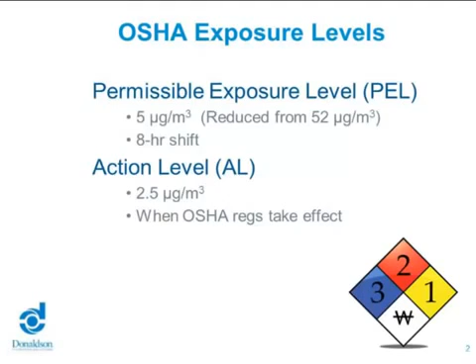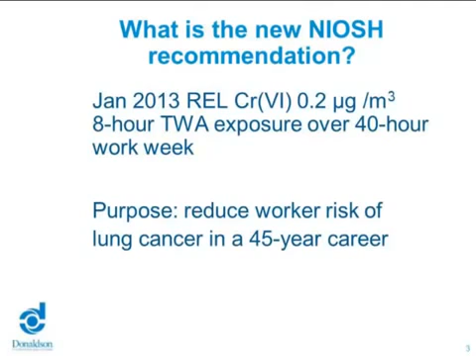The new NIOSH recommendation is a recommendation that came out in January of 2013 originally. The recommendation is to reduce the level from the 5 micrograms it is today down to 0.2 micrograms over an 8-hour time-weighted exposure over a 40-hour work week. That's a dramatic drop. Now in September, NIOSH came out with a revised version of that, but the recommendation did not change. The purpose of reducing it from 5 micrograms down to 0.2 micrograms is to reduce worker risk of lung cancer in a 45-year working time.

I'm a pretty visual person, so I like to have some kind of an idea in front of my eyes on what all this means. And so what you're looking at on the screen right now is our 2 canisters that are 2 3/4 inch diameter by 3 5/8 inch tall. What I did is I said for a typical system where it's welding, where a majority of the hex chrome is produced, I calculated for an 8-hour day, 40-hour week, 10,000 CFM, 17,000 CMH system, how much hex chrome could be emitted or someone could be exposed to in a year.

Now what I found was through those calculations at 5 micrograms per meter cubed, someone could be exposed to 172 grams per year. The canister that you see on the left is about halfway full. Then you go to the right where the new recommended exposure level of NIOSH is, and you do that same calculation, and the number turns out to be 7 grams per year. You can see that barely the bottom of that canister is being covered. So it goes without saying that that's a dramatic drop.

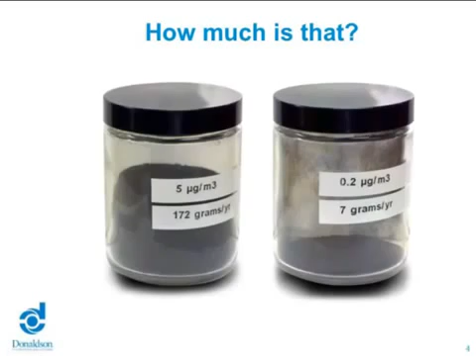So what processes produce hexavalent chromium? As I previously mentioned, welding is probably the single biggest producer of hexavalent chromium. And welding on stainless steel in particular is a pretty significant source. Another source is thermal spray, which is what you see on the right-hand side. And other processes include battery making, cement manufacturing, abrasive blasting, rubber manufacturing, coatings like spray paints and pigments. If somebody is chrome plating, the open baths can produce hexavalent chromium, and leather tanning. So there are a lot of places where hexavalent chromium can be produced.

Now, one thing to point out is there are some good uses of hexavalent chromium. Hexavalent chromium itself can be a good anti-corrosive agent when it's added to paints, primers, and other surface coatings. And also, a hexavalent chromium compound called chromic acid, used to electroplate chromium onto metal parts for decorative and protective reasons, is another good use.

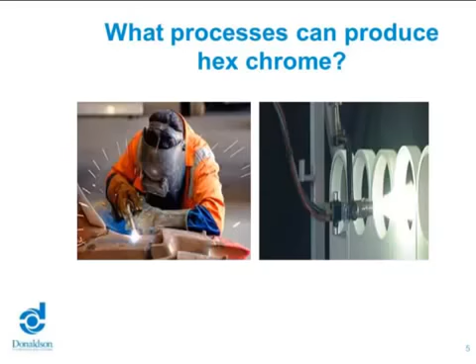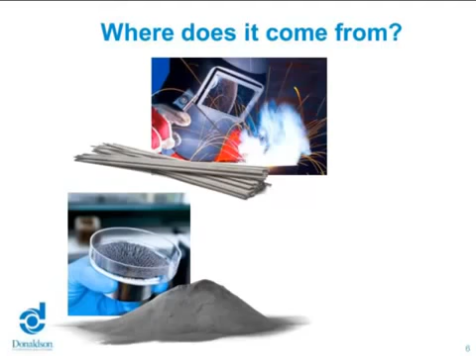So where does it come from? Well, chromium is in the mixture of, for example, what you see in front of you, the welding stick or the thermal spray wire that's used in each of those processes. Or it could be in the powder for thermal spray, or it could be in the base metal that you're either welding to or doing some kind of process on.

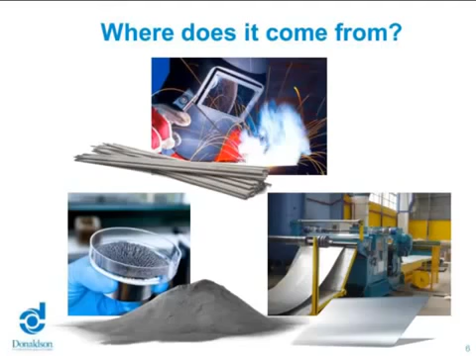In the chrome bath, for example, it's in the chrome bath itself. And what you have to realize is these aren't just pure chrome. They're mixed with other materials like aluminum, antimony, arsenic, chrome, cobalt, nickel, iron, lead, moly, manganese, silver, and tin. So there are percentages of those metals mixed in with these depending on what you want for the outcome of the process.

So people ask me, being in a filtration company, can I just filter hexavalent chromium? And the simple answer is no, and it goes back to the point I made a few minutes ago, which is that the materials used in the initial process are already mixed with metals. So when you have an overspray process of thermal spray, or you weld, or you generate some kind of fume, the fumes contain mixtures of the metals as well as the hexavalent chromium. So I like to think about the hexavalent chromium being the seeds inside the orange, where if you filter out the orange, you are going to actually filter out the hexavalent chromium.

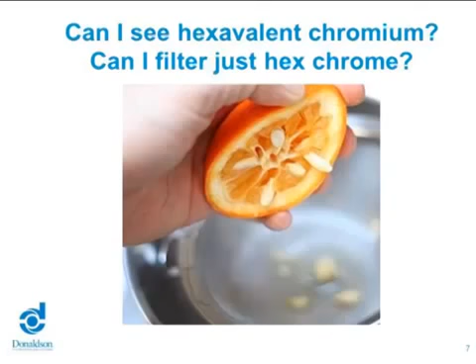People always ask me too, well, how do I prove what level of hexavalent chromium I have? And the reality is there is a specific test for hexavalent chromium. The OSHA ID is ID-215. It's, again, specific for hexavalent chromium. It's a test that lasts about 8 hours. And what really happens is a person properly protected for the exposure of hexavalent chromium goes into the area and spends 8 hours being exposed to the exact same things that anybody who's working in that area would.

And then once the samples are taken, they get sent to the OSHA Salt Lake Technical Center in Utah, where they are analyzed. It's a time-sensitive test, so it has to be analyzed within 8 days of sampling. Essentially what they do with the sample is they precipitate out the hexavalent chromium and then report back how much hexavalent chromium was in the sample, so you can use that to estimate how much hex chrome you are producing in your facility.

If you want more information, I'd highly suggest you go to OSHA's website at osha.gov or contact them at 800-321-OSHA. Every time I've called them, they've been very helpful, and I have gotten somebody on the phone live in a relatively short amount of time. So I encourage you to do that.

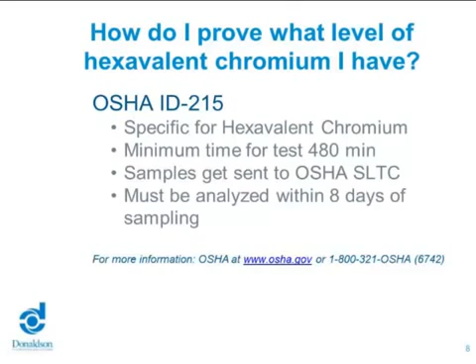So I also wanted to understand, when I was doing my research, what were the hexavalent chromium inspection levels like? There is a study on OSHA's website. It's a 2006 to 2009 study, so it's before the regulations actually took effect. It's called an industry sector profile. And in that profile, there were 437 records, each record being a company visited, and 65% of them had hexavalent chromium in the air.

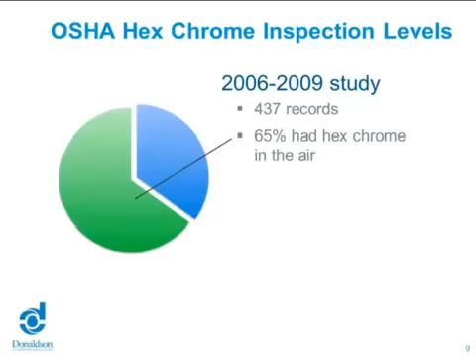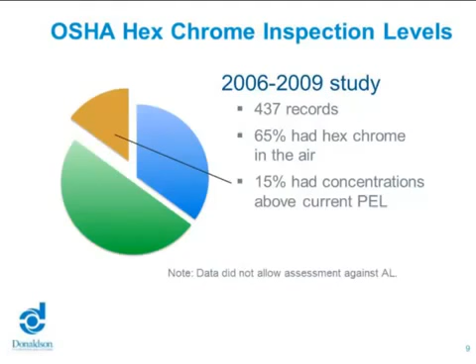Now, of those 437, 15% actually had concentrations above the current permissible exposure level. Another way to look at that is to say that of the 65%, 23% had concentrations above the permissible exposure level. Unfortunately, the data did not allow me to do an assessment against the action level. And it would be nice to understand what the numbers would look like if we were to evaluate those same companies against the new recommended exposure level by NIOSH. Hopefully in time we'll get there.

So many of you are probably wondering, what should I do now? Well, I came up with the acronym Rescue Me, so we'll go through that right now. The first thing is every company or anybody in your facility should review your production processes. Look for those processes that could be producing hexavalent chromium. Look for materials that you're bringing in that could contain chromium itself. And then think about how those materials and processes interact and see for yourself if you think the process is producing hexavalent chromium.

OSHA will drive everybody to eliminating the source processes wherever possible. And one example I can think of to get the juices flowing is to think about a weldment. Let's say, for example, a company makes a particular weldment and they make thousands of them in a year. Well, if you ask yourself, what if I took this weldment and gave it to a casting company and they made it out of a casting?

Well, that would certainly eliminate the source process there, and there might even be a byproduct where your company may realize a cost reduction. So it's worth investigating your processes and the materials together and seeing where there might be opportunities to eliminate them, because you might get other benefits other than just reducing hex chrome in your facility.

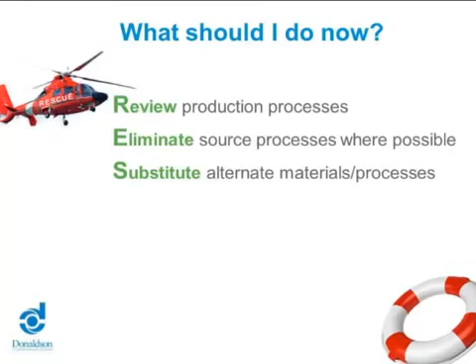Lastly, if you can't eliminate them, OSHA says the next step should be substitution of alternate materials. Certainly, you have to look at your customers' requirements and make sure that whatever you're doing, you're meeting those requirements. But if you can use alternate materials and achieve the same performance as the customer expects, that's really the next step.

And if you can't do either of those, or if there's just a situation where it makes it very difficult to do those, then the next step is controlling it using local exhaust ventilation best practices. I'm going to talk a little bit more about that later on in the presentation, but just to give you a snippet right now, local exhaust ventilation means having a hood that's located close to the process, designed appropriately to pull in any fumes or any dust or mist that could be creating hexavalent chromium,

and then a properly designed grouping of ductwork back to a filtration device or sending it out the building. So that's just a quick snippet of what local exhaust ventilation means. So that would be controlling it, removing it from the airspace that your employees are working in. Next is to understand the impact. Once you've done all of that work, you have to understand what you have done and whether you've made a difference. And so that may mean more testing and more evaluation.

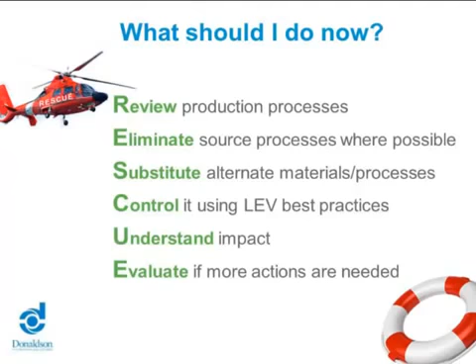And lastly, if you've done all your work, you have to actually evaluate whether or not more actions are required, and that may force you to start over and review your processes again. So this is the first time of two that I'll remind everybody, but rotation of employees as a method of compliance to the permissible exposure level is not allowed. That's clearly noted on OSHA's website, so I just want to make sure that people keep that in mind.

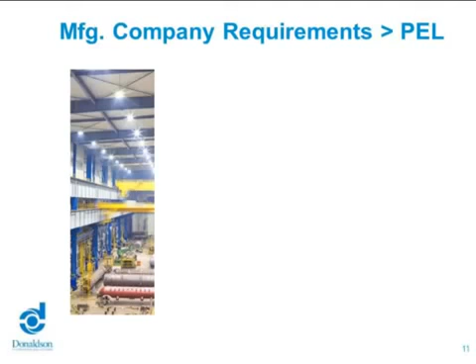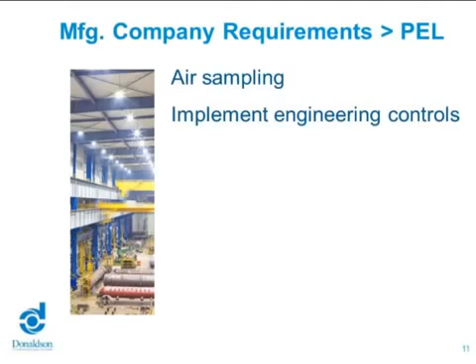Involving employees and operators in the solutions that are being talked about and hoping to be implemented is certainly a good best practice for industry. You'll get adoption much quicker if you do that. So if a company finds themselves currently above the permissible exposure level of 5 micrograms per meter cubed, there are a number of things that have to be done. One is air sampling, and I'll talk a little bit about the frequency of air sampling on a later slide. But air sampling is a requirement of any company that has exposure levels above 5 micrograms per meter cubed. Next is implementation of engineering controls, which we talked a little bit about already.

Respiratory protection program. This is really key, that if an area is known to produce above 5 micrograms per meter cubed today, the respiratory protection program has to be in place, and it has to be documented. Medical monitoring of employees. Remember, this actually starts at the action level, but it's also required at the permissible exposure level of 5 micrograms per meter cubed. And demarcation of work areas. This is really important for not only employees but also visitors to your facility. You have to mark off the areas that could be producing hexavalent chromium, so people are warned of what they could be exposed to. And a part of that goes with training.

Training is incredibly important. Like if somebody walks into that area, what do they need to do? Does it mean that they have to wear a respirator? Probably yes. Does it mean that they have to wear special clothes and make sure they don't wear them going out of the building? Yes. Does it mean that if they worked in the area, they have to wash their hands before they eat, smoke, or put on makeup? Yes. So those are all some things that an employee has to be trained on. There's more, but those are just some examples of things to think about when it comes to an employee training program.

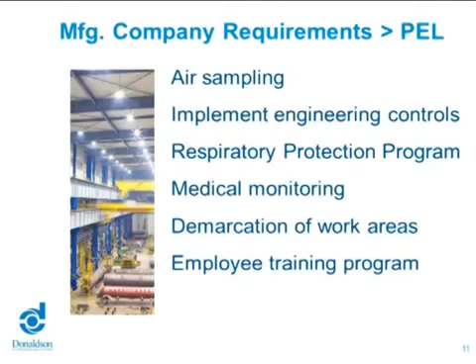So air monitoring frequencies. If your facility or your particular area of your facility is above the permissible exposure level, air monitoring frequency has to be every 3 months.

Now, if you're above the action level of 2.5 micrograms per meter cubed, but below the permissible exposure level, then you have to monitor every 6 months. And then if you're below the action level of 2.5 micrograms per meter cubed, then it's suggested that you do an initial baseline and then follow the facility air sampling strategy. An example that we've seen in industry is yearly.

But also keep in mind that facilities change a lot. They'll change processes, they'll change materials, so it's best to really think about having a procedure that really makes you think about what could be producing hexavalent chromium in your facility, and deciding at that point when you bring it in whether you need to run another baseline.

Engineering controls, as I mentioned, anything or any processes that are above 5 micrograms per meter cubed, you must, by OSHA's standards, have engineering controls. The deadline already was May 31st, 2010, so that means if you have processes producing above 5 micrograms per meter cubed, OSHA could come in and cite and penalize for that. So make sure that if you are above 5 micrograms, that you have the respiratory protection program in place. That's mandatory until engineering controls are implemented.

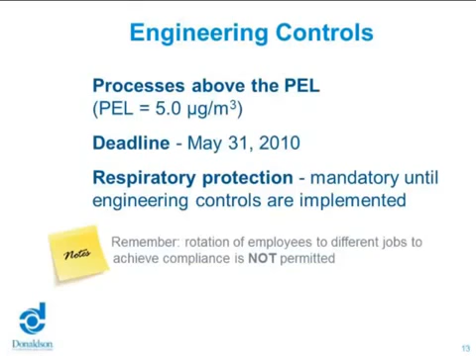So the local exhaust ventilation control guidelines. The American Conference of Governmental Industrial Hygienists has created a book, and they're on their 27th edition, called Industrial Ventilation, a Manual of Recommended Practice for Design. Now, this book has a lot of good information related to good ductwork design, good hooding design, gives you recommendations on fans and dust collectors and so on. So it's a good general overview of what industrial ventilation looks like in a facility.

Now, the VS numbers that you see in front of you are what are called VS prints. And they are single-page documents for the most part that have illustrations and guidelines for airflow and velocities required for those particular designs. Now you can see that the ones I pulled out are more pertinent to most of our audience today, and that's for welding, robotic welding, metal spraying, torch cutting, and then laser tables. So there's a lot of good information.

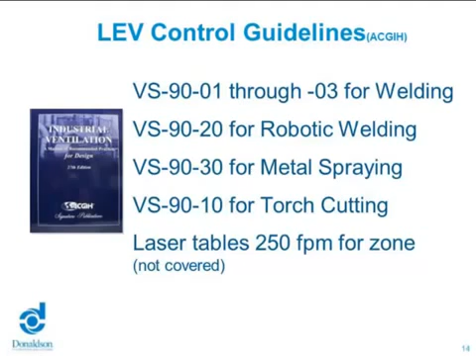ACGIH does do courses throughout the year. They do them about 3 times a year at different parts of the country. So if you want to learn about good ductwork and industrial ventilation design, I'd encourage you to go out to ACGIH's website and take a look at when the next course might be available for you.

Now, resources for help. So I'll start with the International Thermal Spray Association. They have some really good guidance on their website related to the processes and materials that are used in that particular industry. And they are processes that you may want to be looking for in your facility when you are evaluating where you might be producing hexavalent chromium.

The California Air Resources Board has on their website, in particular for thermal spray still, some guidelines on ways to estimate by process how much hexavalent chromium you might be producing. So that's another good resource. And I do have a little bit of that information in my most recent paper, but we'll talk about that in a minute. The ACGIH website also has some good information, and that is where you can find out about the courses I just mentioned, as well as how to order those books.

And then the U.S. Department of Labor, OSHA's website, NIOSH's website, the Department of Health and Human Services, and the CDC all have wonderful guidance documents out there to help you learn more about hexavalent chromium. Now, NIOSH's website in particular has the 168-page report related to the new recommended exposure level, and the basis for reducing it down to that level is also in that report. So if you want to learn more and read more on it, it's right there on NIOSH's website. The last thing before I mention Donaldson-Torit is OSHA does have on-site consultation services to help.